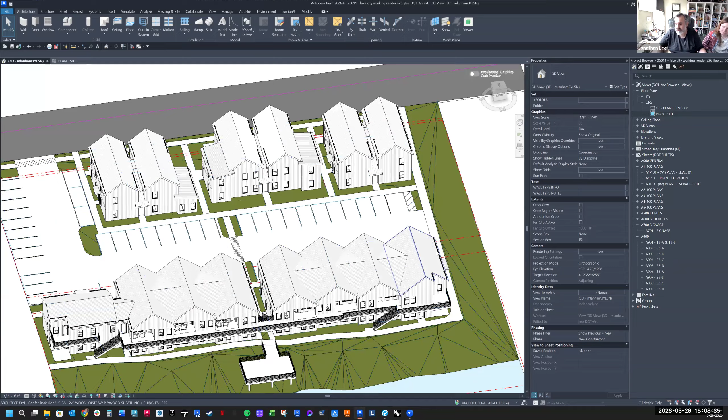And so this really simplified that by creating a little bit of a wider set of units, but doing 2 sets with shared circulation really helped us declutter it a little bit and make the buildings much shorter by an entire story. And so that's why the back is a little bit more dense. And what we tried to accomplish was hiding that density with these more narrow looking units in the front.

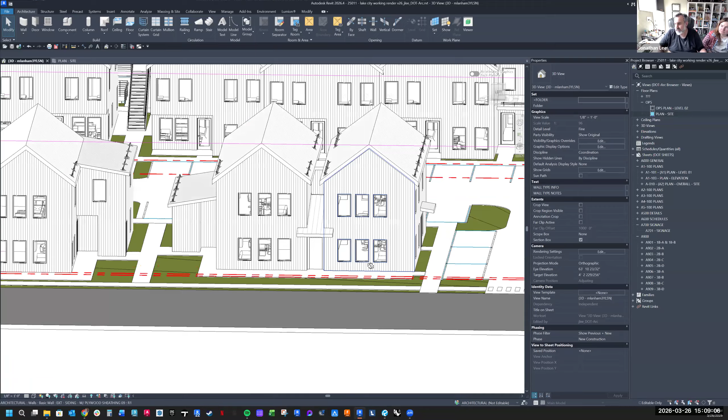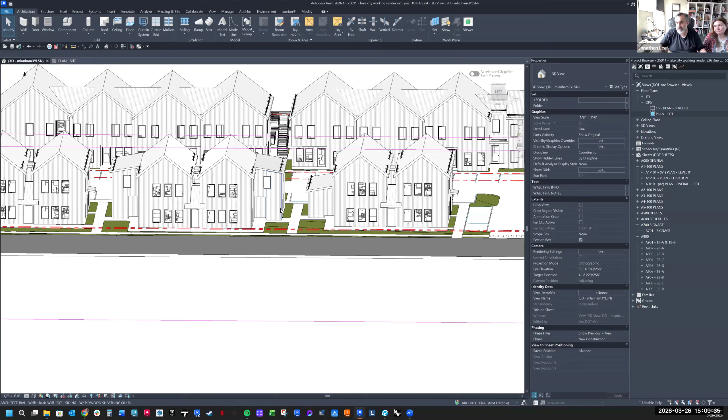And so these units in the front essentially have 2 units stacked on top of each other, and they're split by a staircase in the middle. And we push that staircase back to separate the buildings and create more of that historic rhythm of the buildings. And we try to get as close to that narrow dimension that is in the guidelines as we could. And that's why these front units are more of almost like a shotgun style shape. But they're 2 stories. And then when they're 2 bedrooms, we kept that pushed back so that it didn't impact the front facade and that rhythm that we were trying to create.

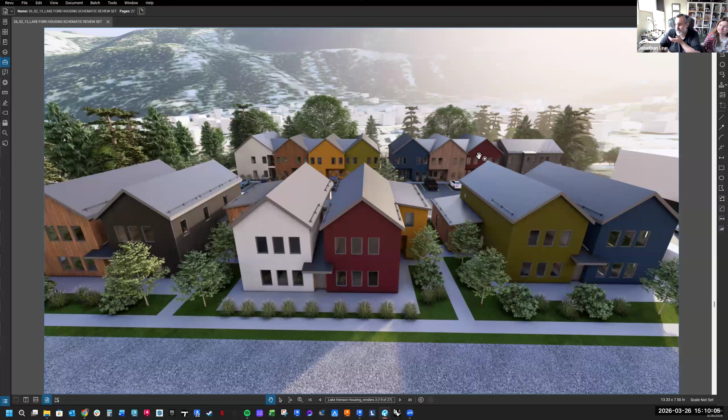It's shown a little bit better in the rendering, so I'll jump over there. Yeah, we actually are seeking a very small variance up front because our units are actually not narrow enough for the affordable side. Yeah. So we're trying to balance many things. Yeah. So these I think help hide the ones in the back. I think the ones in the back are also very nice, and we tried to treat them as individual buildings. And so the color is really there to help differentiate and show you the massing.

And so the colors will probably change a little bit, but that's the idea, is that these feel like individual homes that are more like a townhome in the back, and in the front, more of that traditional scale. And we tried to break that up as much as we could while still making them somewhat efficient with circulation and helping people get around. And we wanted to create some green space between, and we're working with our civil engineer to get a little bit more space between the units so that there's less icing in those pathways. But that's kind of the focus of what we've been working on.

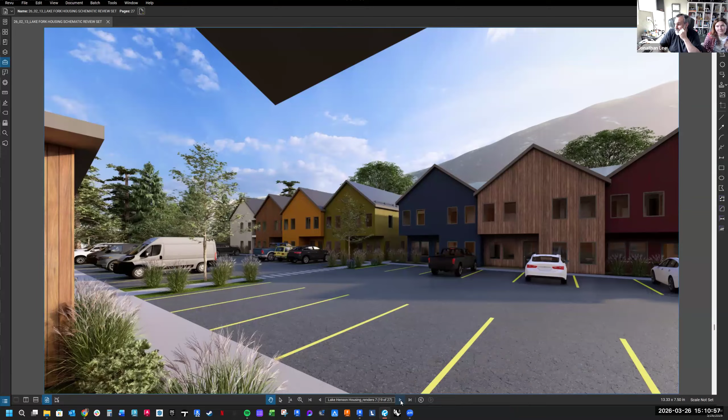This also doesn't have any grade taken into consideration, so there's a bit of a drop right at Henson Street. So they'll be a little more tucked into the site. Yeah, and basically what Mally's alluding to is on this front side of the buildings, this grade may come up and make the buildings feel even shorter than they are right now. We just haven't implemented that into our renderings or our model yet. We're waiting on Civil to do their final layout before we implement that. But this grade kind of comes up at the street, and so the buildings may be recessed a little bit more into the grade, which would be, I think, helpful as well. So,

Okay, thank you. I mean, in general, I like the layout. I think, given the number of units you have to fit in, it follows the guidelines reasonably well in having the separate units there, especially along the front. I've got a few more comments, but I want to open it up to other members of the commission first, before I say too much. Thank you, Joe.

One question I've got just on the windows: what type of windows are y'all planning right now? So that's a great question. Right now, these are more of a placeholder. We were trying to do a more traditional shape, being a rectangle, but we can add divisions. We can make them operable. We can add mullions. These aren't set in stone. That's one of the opinions we'd love to get from you guys. Is that proportion close to what you would be looking for? Do we need to make them skinnier, wider?

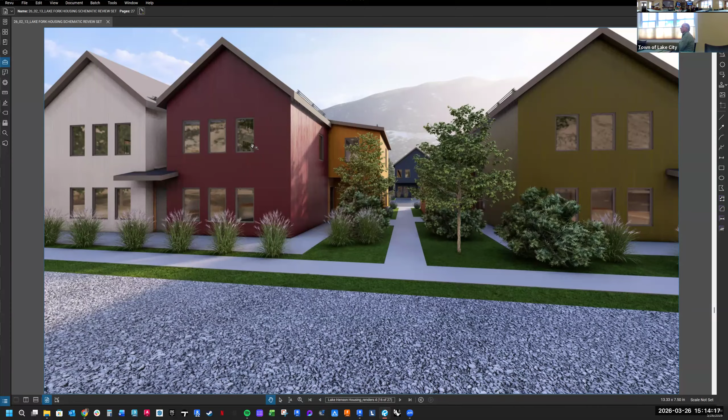And then the other one, not on the whole, but on the second floor, and at least on what's exposed to Henson, maybe some little added molding. Not necessarily all the windows, but at least the upper ones you see when you drive by. I'd like to see that, and I don't think either one of those would be that much more expensive. Yeah, no, those are all good feedback. Those are things we can definitely add in, come up with some trim details for the windows. Maybe we can make them a little bit different in different buildings. And we'll definitely work through the windows. We did these as a placeholder as we work through the interiors, and once we've set the window locations, we'll update those to be more operable and have the mullions and other items that you guys are looking for.

No, I guess Mike, go ahead. I think it looks great. I love the thinking that you guys put into it, and this is something that our community has needed for such a long time, and I'm really impressed with it. It's not my place to talk about aesthetics, but I think the aesthetics are great. I love the color. Yeah, thank you. I think it's really well done. Thank you, Mike. That's so nice. Thank you.

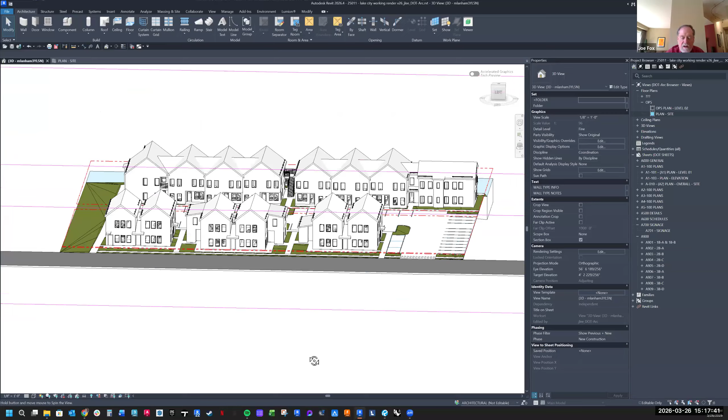Jonathan, you mentioned a minute ago the possibility of having differentiation in the windows from one building to another. I like that idea — I think rather than having them all the same, if there could be some differentiation. I know all of this comes back to costs and so on, but if some of these kinds of things can be developed at this point into your plans, I think that'd be great.

But in the past, we have, for example, asked for new residences in the heart of the historic district to have divided windows, at least on the front of the buildings. I would suggest that as a possibility for at least the front. If there are some differences in the configuration of the windows, or in the style or trim and things like that, I think the differentiation would be nice to have.

Yeah, we can definitely do that, and I can speak to that a little bit. I know one of the guidelines talked about lining up the front facades of buildings, and one of the things we had feedback on was looking at what if we shifted one of the buildings forward — so that's what we did with this middle unit.

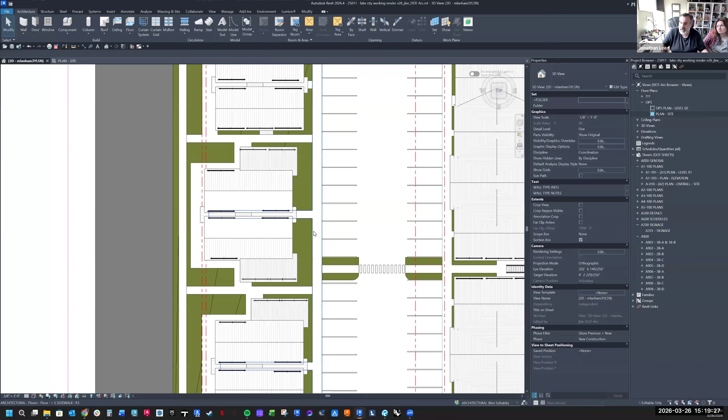These two on the end line up, but we pulled the middle unit out. So as you look down the street, that's going to break that up a little bit, so they're not so much in line. That's an option — if we want to keep it in line, we can pull it back, but we kind of liked that feeling of it not necessarily lining up. It does add some difference between the buildings visually just by doing that move.

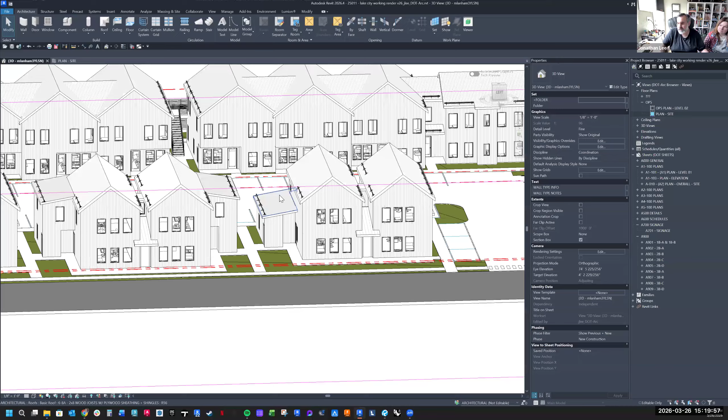The other differences between these: this building has two one-bedrooms. This building has one bedroom and a two-bedroom, which breaks up the roof height on this unit — it doesn't have that second-story bedroom. The middle is a little bigger because it's in the middle, so it has two bedrooms on both levels. And on the very end here, it's all four one-bedroom units. So by mixing up the unit types, it actually changes each building and makes each one unique.

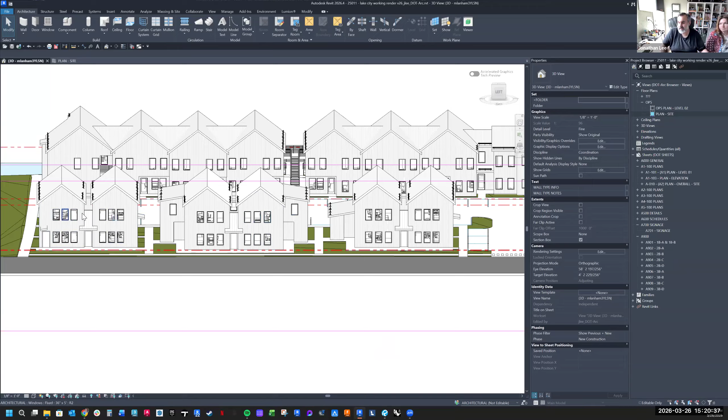We try to break it up in different ways throughout all three buildings, so you get a different feel, and that can change the windows a little bit, especially in the back. But we can definitely look at bringing that to the front as well and make some of these front facades a little bit more different. That was really what we were experimenting with the buildings — to break it up in different ways using the site as well as how the units themselves are laid out.

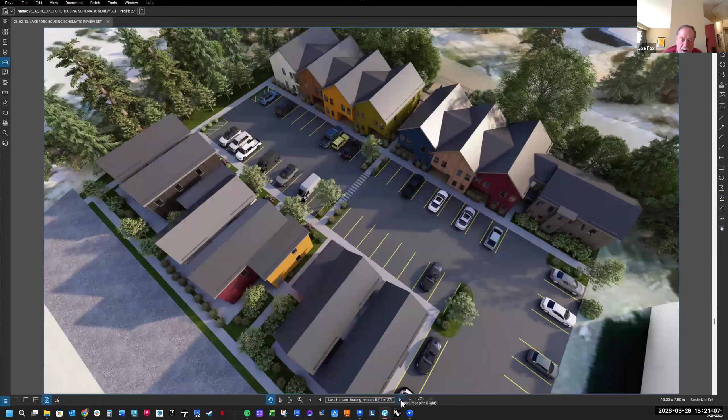Well, I like having that — that's something to think about, having some differentiation of the buildings. I can mention Jared and I had a little discussion about the setback business. The design guidelines say specifically to try to have new construction fit in with the neighborhood setback of other buildings there. This block doesn't have too much in terms of other similar kind of residential stuff. But I personally like the idea of having a bit of differentiation — not too much, but a little difference in the setback. It gives you a bit of difference as you go down the block there. I like that.

One of the things I wanted to ask, I'm curious, one, I assume the roofs are all going to be metal or what?

Yeah, that was the plan. We were going to plan on metal roofs, just to help with ice and other elements where things come together. I think they'll be a little more sealed with the metal, and I think the aesthetic fits with the feel of the town.

Okay, my question is this: how does Colorado's new building code business associated with fire resistance affect how you think about what the siding would be?

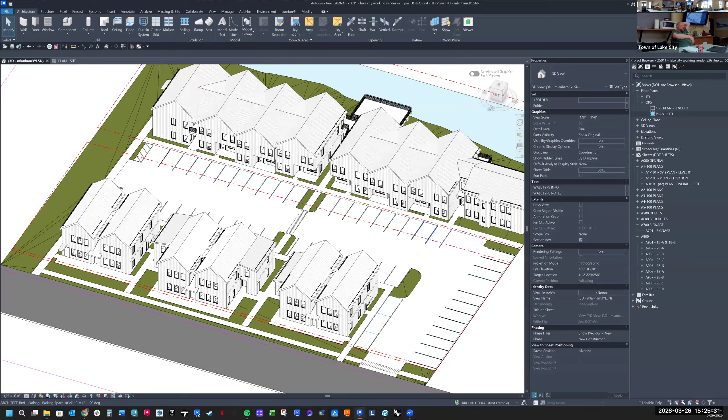But yeah, with the siding there's probably options there that might be a possibility, especially if we phase it. So, y'all continue your conversation, don't listen to me. We might be able to make it work.

One of the things we were looking at was maybe building these four units all at the same time, and then building these four units at another time. So that all works with that phasing. We've actually structured it so that technically you could build each one of these units independently of each other, and that would still work. So there's lots of options towards that side of things.

But to your point around materials, they do make a lot of different materials now. The technology's gotten really good with different types of wood.

They even have aluminum siding, which hasn't been great in the past, but now it actually looks identical to wood and lasts a really long time because it's a thicker gauge than what they used to use back in the 70s. It actually looks really good.

So there's a lot of options for fire-rated facades that still give you that natural wood look, and we want to have some real wood tones interspersed as well. We're going to do our best to fit those into the budget. Something on the concrete siding side, like Hardie board type, is that those patterns are very flexible.

When I say flexible, you have a wider choice. I personally like that direction, and the reason is the fire retardant quality, especially with the density of the buildings, is very important to me.

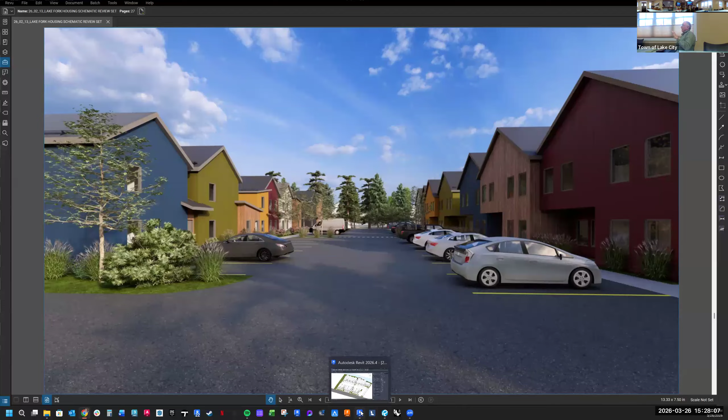Especially with the north sides more than the south, you might want to have something across those bottoms, east and south, to protect against snow buildup, because on the north sides I think you're going to have a minimum of 3 feet of buildup on the building.

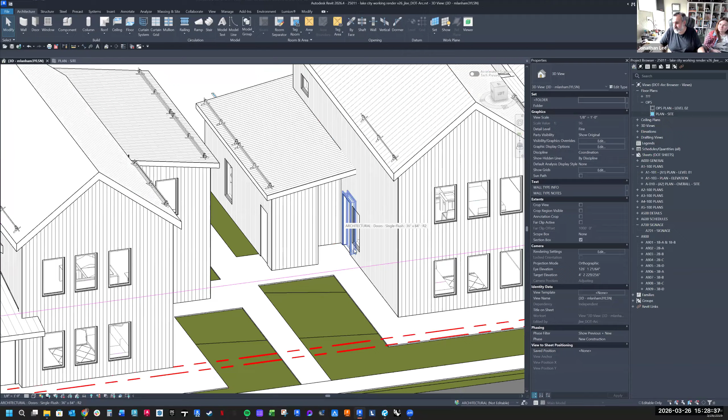Yes, so we took that into consideration, and one of the things we did is all these north entrances are actually recessed and have a roof over top to protect them from the elements. The only entrance we had on this north side, we moved to the front.

We'll put a decorative awning over that, which will also help break up those facades. The only other north-facing door we have right now, we can add some roof over top of, but it leads out to the porch and rear entry of this building. So we limited it pretty well.

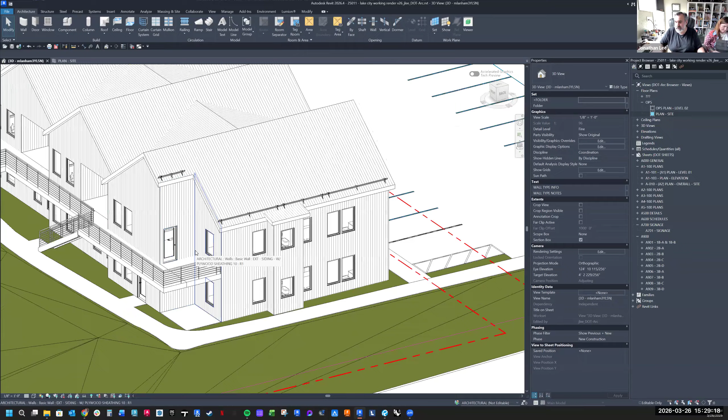For the most part, we'll have a few spots where we'll have to think through protection a little bit more, but I think we've gotten most of it pretty well protected in the design.

I'll try to pull up some of these materials really quick to show you. You can't really see on our screen, but we have some samples of some of the actual wood tones, and next time we're in town we can bring those by.

Do you remember the manufacturer on this? Is that a concrete material? Yeah, so this is basically either Allura, which is a manufacturer, or the James Hardie brand. What you do is send it off to a company called Woodtone, and they have shake, vertical, and lots of other options.

I can try to get as close as I can to the monitor so you can see the wood grain there. The finishes are wood in nature, so it would pick up that stain. It's pretty convincing—obviously not as warm as the real stuff, but also way less maintenance.

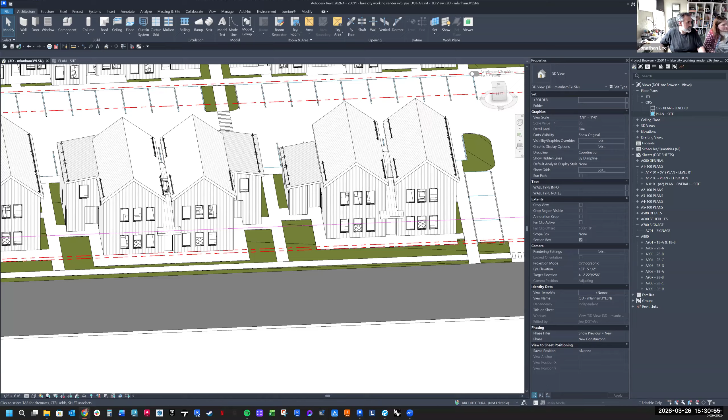I could just tell you we've had some discussion with regard to those kinds of looks, and I know not everyone on the commission is in total agreement on this.

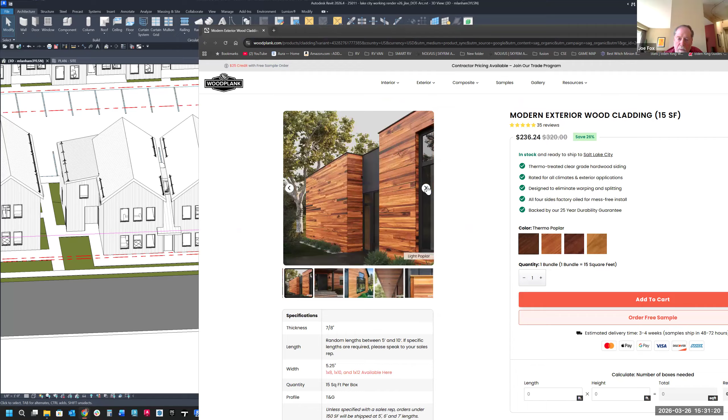Historically, wood buildings that are painted, you don't see a lot of that grain in it. I personally don't think there's a big importance in seeing the wood grain and things like that—it would make it look more like historical houses.

The other thing is with colors—we don't have a say as to what color is appropriate or not, but there is a recommendation on our website associated with colors, and that's just a recommendation to keep a so-called historically appropriate palette. Along that line, I would prefer not to have too bright colors associated with the buildings, more the muted ones associated with the historic color palette. But that's just a recommendation.

Yeah, I do think our second charrette is going to be really helpful, because I 100% understand where you're coming from. But there's a coral I saw, there's a nice purple—those may be the buildings you all talk about to each other, but they do exist, and some people like the colors.

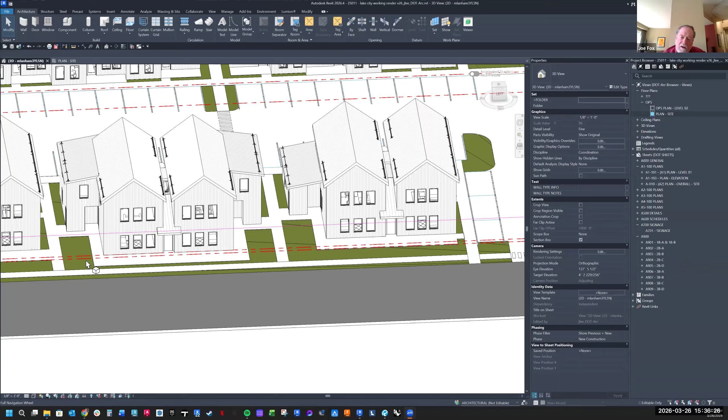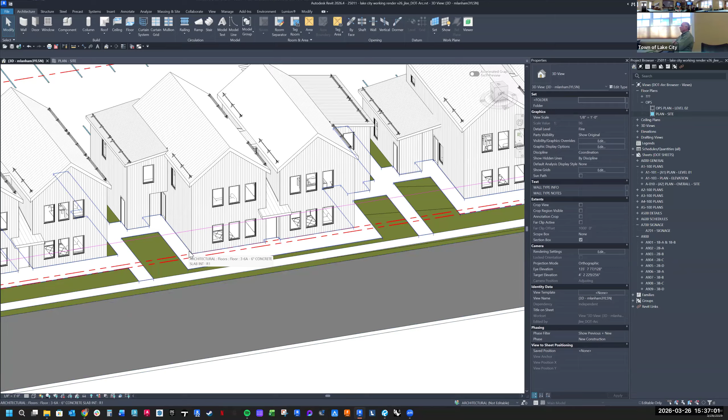Judd, are you talking about some wainscoting or something like that, or what are you thinking of? Well, I agree with what Mike has said, and also Kenny. I really like the proposal and the thought that y'all put into it, and I wouldn't be saying this if I didn't mean it. I was more concerned about the north side areas, where it comes off, and I see you have protection on that off the roof, which is very smart, but I do think you need to come up with something where that door is that you're showing now. Man, that's gonna be a bear.

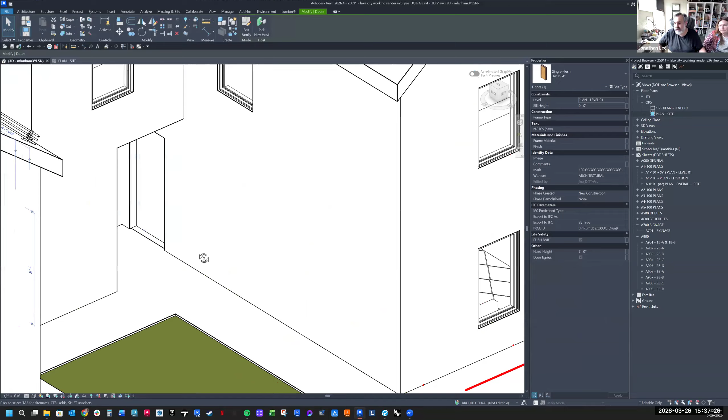So that's a storage room, and we can add an awning over top, but it's just an exterior storage room. The main entrance is actually underneath this canopy. It's a little hard to see, but you have to go back into a recess, so that will stay pretty clean most of the year. But I understand that against the building we may need to consider raising the foundation a little bit or making it look like it is, and maybe we could add a bit of metal around the bottom to help protect from ice, so the siding doesn't get damaged. So we can definitely look at those things too.

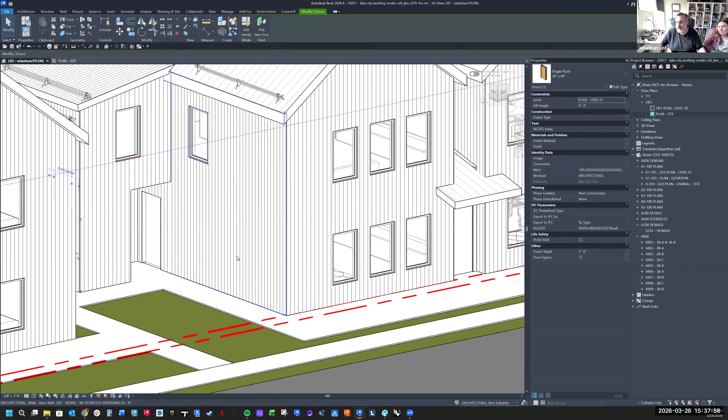Okay, two things, real quick. If you talk to the engineers of the products you are working with and they say that's not a problem, there might be some kind of ice and water shield that goes between there. I'm just letting you know where that door is, with that little area, that whole area in there.

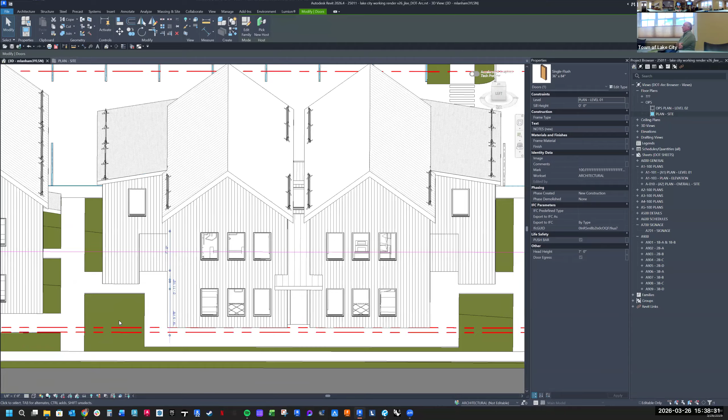I've been here a long time, my man, and that's going to be a pain. And I know you're talking about back on expenditures, even if you had something, not the whole sidewalk or anything, but at least around there that would be heated. But that is a problem area, which has nothing to do with what we're... I got off subject. I apologize, everyone. No, that's helpful.

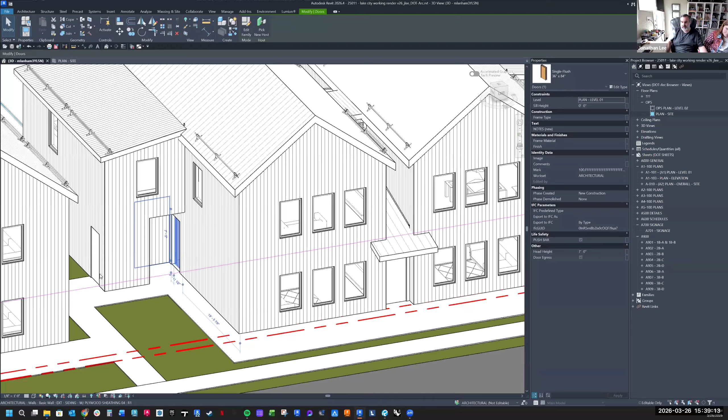Yeah, and maybe we can think through, maybe there's a way to add some sort of awning along the north side of some of the buildings to help protect the sidewalk. Those are things we can definitely look into. We did, like I say, try to recess the entryways, and these storage units probably need some protection too. So we can definitely look at that, and maybe we just add an awning or a roof over those doors for access reasons. So that's really good feedback. You guys live it every day, and so getting that feedback is really helpful.

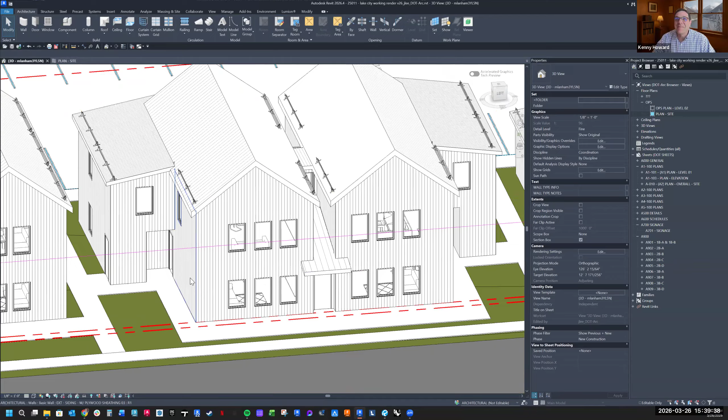I guess I'll go next, since we're still in rotation here on comments. Look, I can't wait to see the color palette. I do like, even in the renderings that were sent, the color differentiations between the buildings; consistent color across, I think, just kind of washes everything out. I think that separation looks good. I think one of the things to consider is on the fronts of the Henson facing. I see the awning and roof for the entranceways in the middle. Maybe it's worth carrying some of the visual separation between first and second floor on the street facing. So almost potentially carrying those lines over.

And I know you guys are going to continue to develop the renderings, taking cues from window treatments from around, generally what you see, especially on wood buildings, casing window treatment around the outsides and whatnot, that maybe don't show up as much on the renderings. But as you guys progress drawings, it would be good to see what you're thinking around the window decorative aspects, as well as potentially separation. But I do like the color differentiations just from a separation of building. So it's going to be good to see, when you come for public review, the color palettes that you bring. Thank you.

Yeah, and we'll come up with, like I said, a few different options for that. And one thing we always like to do, like you're mentioning, is make each building one color, so that way it's seen as one building and not cut up by each facade being a slightly different color. We don't like doing that. But I think that helps separate the look.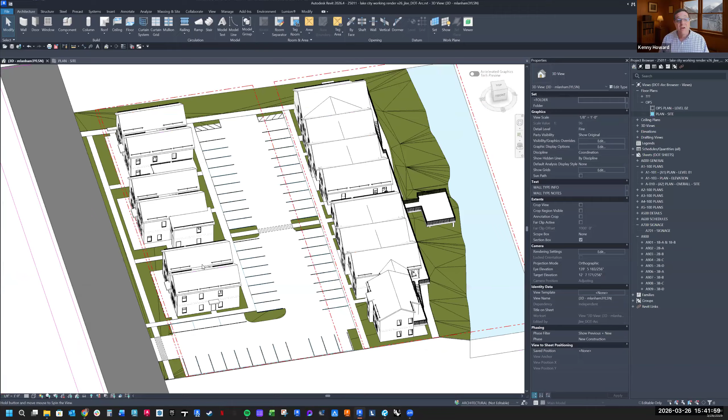Yeah. So the next question is not regarding the buildings themselves, and I know you don't have your engineer on, but thinking about site plans and drainage, we've got a pretty high density lot. What are you proposing from an impervious cover perspective? And how does that fit against the guidelines? And from a drainage perspective, are you planning to drain toward the creek, I guess the creek coming off Pete's Lake, that little ditch? It's a creek. Yeah. What are you thinking about for site drainage?

Yeah. So in our other meetings, we've had a lot of different conversations about this. There's a lot of options floating around right now. There's a little area to the northwest across the street that we were looking at potentially using. The thing we're leaning toward the most would be a dry well underneath the parking area. Okay. So that would be like a gravel pit that would hold water on your site. Retention pond, basically. Yeah, covered, but it's all retention underneath the asphalt there.

So those are the things we're currently studying. We don't want to drain anything directly into the water. It would all be collected on site and then slowly percolated into the groundwater. All right. Very good.

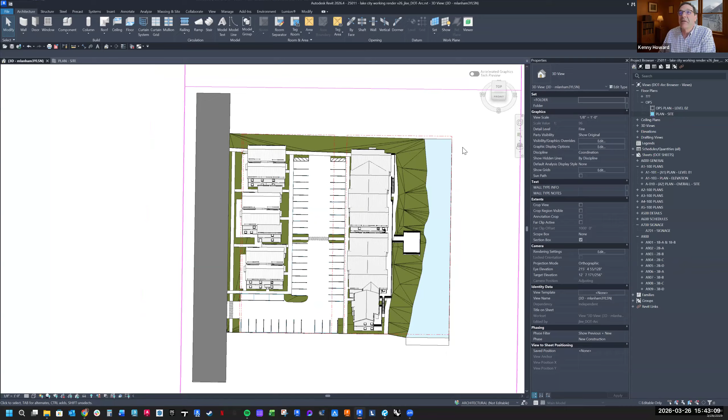Mike, I think I'm done. I think you might be next in rotation. Sorry, I'm taking notes. I'm the secretary. Oh, you don't have to take real detailed notes for workshops, Mike. Oh, okay. Well, never mind.

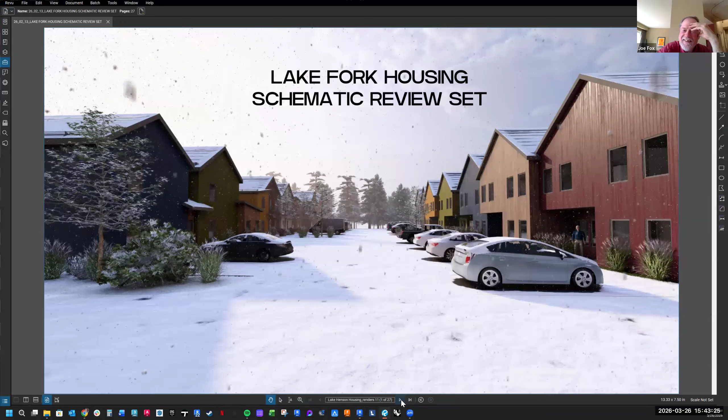Yeah, and kind of following up on that, is that going to be an asphalt parking lot? Good question. Yeah, we've kind of talked through different options. I think that's kind of where we were leaning. There are pervious versions of that that allow water to drain through, but one of the concerns would be the freeze-thaw and that kind of breaking up over time.

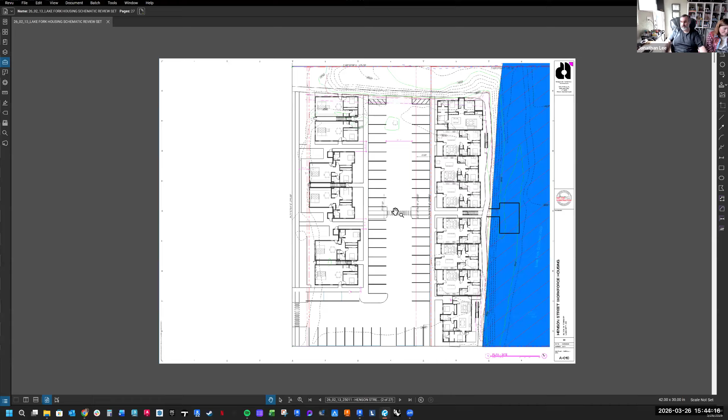But our plan was to make it some sort of a hard surface, just for the longevity of the parking stalls and clearly noting where people can park so it doesn't become kind of muddied up. If we did a gravel parking area, it would probably be difficult for people to fit. So those are things we would also take feedback on if there's a preference between what type of surface it is. We can look into that.

And we've also had a lot of good and interesting conversations about planning for accessibility. And in those conversations, accessible parking was highlighted as something that is needed in more units than what we would typically be required to have per code. Essentially this whole site needs one unit. And we're proposing, I think, 4 parking stalls, and we're going to make more of the ground floor units accessible. So in the future, if people need that, then they can have that.

There's also a little bit of a change to this layout. There's a fire turnaround that we had to add up on the north side, and we're using that as an ADA stall at the same time. So it has that accessibility space as part of that turnaround. So kind of a good use of space. So there'll be a stall on either end, and then we're looking at other spaces where we can put in ADA stalls as well. So.

Okay, before I forget what I'm thinking of here, I'll add in a couple things. One, I'll go back to, I said I was curious about the rusted metal siding and so on. I really like what you said about your skepticism on it, and the whole idea of metal-looking siding with metal roof. I don't think that fits in with the look of Old Lake City. So I'm glad to hear what you said.

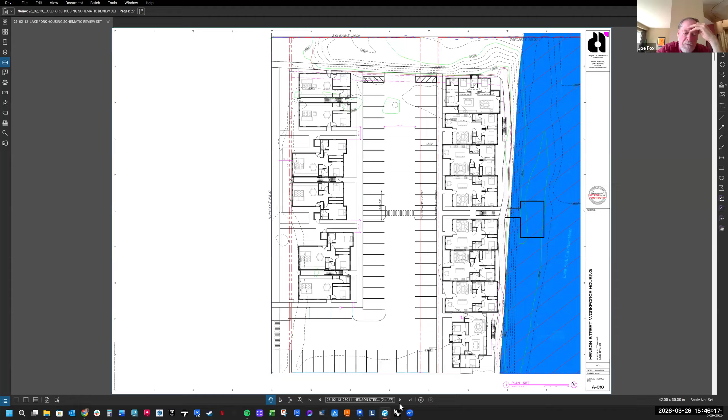I guess I'd just go back to, I think Judd mentioned it in the beginning, some kind of trim around the windows, and we already spoke a bit about some differentiation from one building to the other. I'm going to be very interested to see what you come up with after this discussion. Yeah. Yeah.

Well, what I was just gonna say, one other thing that might help with some of our thinking behind this was, sometimes when you try to make things feel historic, it kind of takes away from what is already historic in the town. And so one of the thoughts we had with the siding colors was, what if somebody bought this house over time and then they ended up painting the wood siding, which happens a lot for maintenance and to protect the wood and things like that.

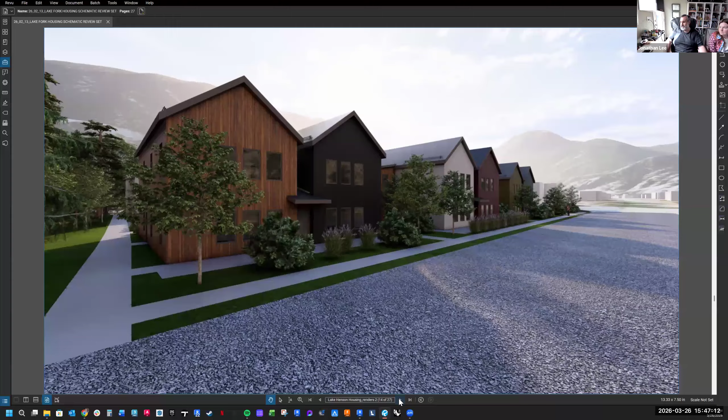And so that was kind of some of the thinking, was maybe this was an evolution of that history. And so it's not trying to mimic too much what's already there to take away from it, but to add to it by feeling a little bit different. That was some of the thinking there, if that's helpful. Yeah, I mean, the whole idea is, you're not building something to look like an old mining town. It just needs to fit in with what's already here. Right. Yeah. Well, really, truly, personally, can't tell you how much that means, Joe. So thank you.

Sorry. I grew up in a small town where my home was over 100 years old, and so I very much get that feeling and that history. And I had a tin roof, and you could hear it rain, and there's just a lot of nostalgia for me around that. And I think creating that, but not going too far, is kind of that balance we're trying to strike.

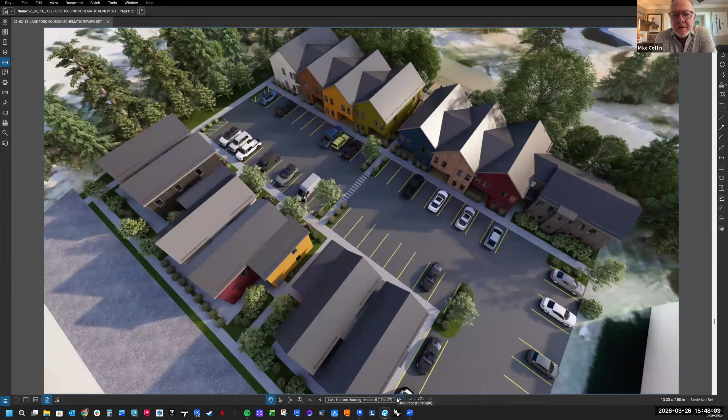Hey, I'm not sure how it fits into a discussion from a historical commission, but I'm just wondering about public areas. That's where I was going, Mike. Thanks for bringing up barbecue pits and bike racks and how people are going to actually live and interact in here. Great question. Yeah. So on the back units themselves, each person has their own kind of private porch area. And then there's these kind of walkways that could potentially be pushed and pulled to create separate deck areas that people could utilize as a community space. But all these back units, every single one of those has its own dedicated porch.

And then we created this little, we're calling it more of like a dock, because we didn't have a lot of space on site to add an amenity, and we really wanted to utilize its access to the water. And so that was the idea we came up with, was to kind of add this little, basically raised dock area that could eventually have walls and a roof if we wanted to use it year round. But we wanted to give this kind of outdoor space where you could have grilling, seating areas, and it can get bigger or smaller depending on what we decide as we work through the overall final design. But it could definitely be repeated as well.

So if it does well and a lot of people are using it, we could maybe add another one a little further down. And it could be open to the public, or it can just be a private kind of thing. So there's a lot of options with that public space. So to further that, that's the second part of the charrette. Our second charrette is to bring some options, kind of get a feeling of what people would actually use, because that's more important than what we think, what people actually want to see.

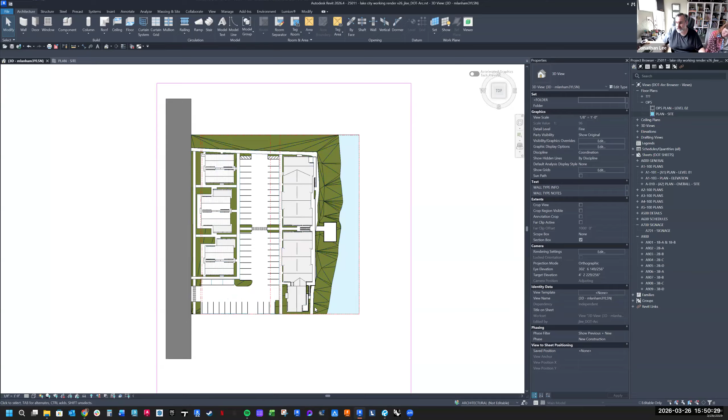Is there a public trail that goes along the river there or not? Maybe Lex can answer that. There is today. Yeah, and we are utilizing that a little bit for some of the circulation to some of the staircases around the units, but we do want to maintain that as a public path as well. It has had to change shape a little bit to allow for the buildings to fit in there, but we do want to keep that as a publicly accessible space, as well as utilizing some of it as our circulation.

Yeah, that's kind of what we heard, is that along the river is the most important part to try to protect. Yeah, and that's why we thought that was kind of nice, because somebody that maybe goes on a jog or a walk could stop and sit by the water, and it would be a nice place for not only the people that live here, but neighbors, and maybe it's a place where people can get to know each other a little bit more.

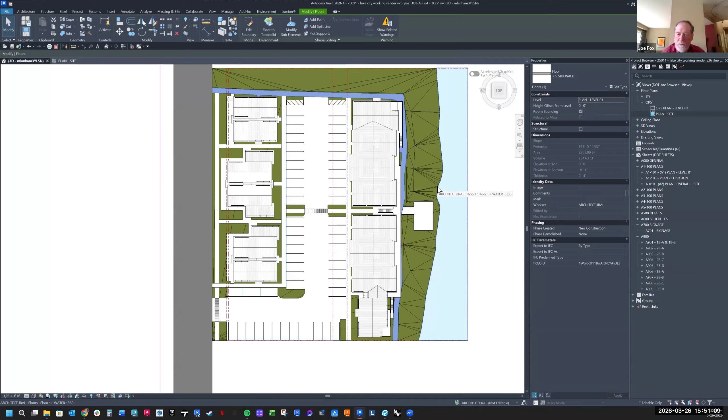Mhm. Well, this is not something that we take into account in approving your plans and so on. And so I don't think we want to spend too much time on it here, but it is something that you need to make sure gets brought up at the public meeting and all that stuff. Yeah. For sure. Thank you. Anybody have any more comments about this? I don't. I think we got the right group working on it. Yeah, that's good. Do you guys have any questions for us?

Go ahead. I have some. So what's your feeling on shakes? Shakes for what? Exciting. Yeah, no, not milkshakes. So an element we've thought about is how to bring in shake siding or decorative elements. Shake siding has not been something that's used much historically in the town. Okay.

I'm sorry, Joe, but is the thinking on shakes at the top level or bottom level or entire building height? I'm just trying to visualize here. I know what they are. Yeah, good question. I am open to it. I wanted to get your opinion. I think if we were to use it, it would probably be the same color and an accent more so than a full siding material. Personally, maybe to break up the gable or something like that. Well, shakes were used on roofs a lot. They were used on some things, but they weren't used for full siding much at all. But I don't have an issue with their use to some extent. Okay.

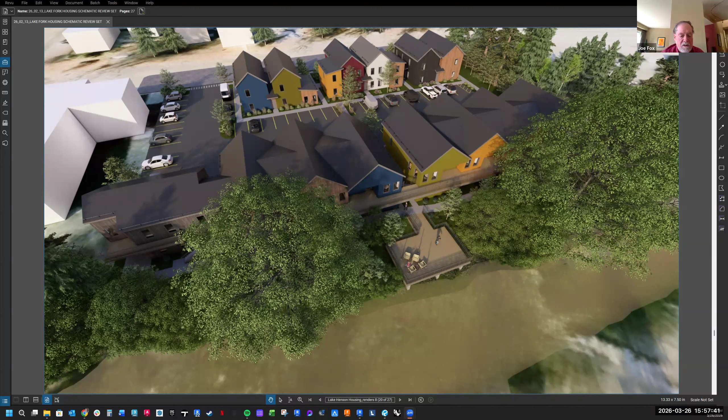Okay, with that, I want to thank you all for coming in and participating in this. It's 3:57, and I'll close the workshop for the Lake City Historic Preservation Commission.